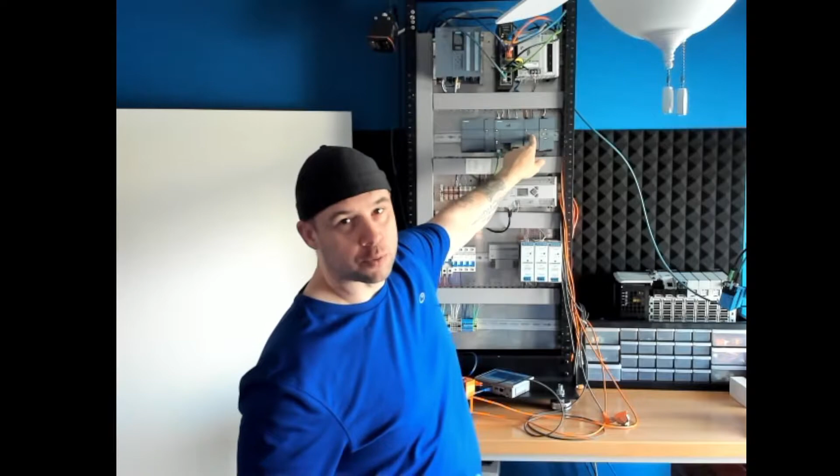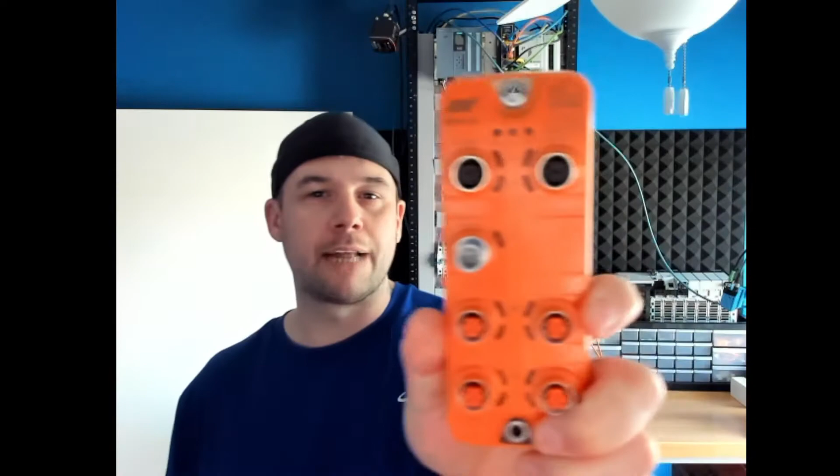So what we're going to be doing is connecting the SM1278 IO-Link module that's made by Siemens directly to their controller. So right here I have the 1200 controller, 1212C, and I have the SM1278 IO-Link module. Now, you notice that a lot of companies are actually producing these IO-Links. One good one is the IFM AL1100 IO-Link master. I'm actually going to be using IFM sensors connected to this module.

But what is the difference? I think the difference to me is in the application. If I've got something far away, beyond the reach of the cable, for these sensors I think 20 meters is the max, or maybe 10 meters. If I've got to go beyond that, I'm using the IFM. Because it powers up and it's got a network cable and M12 network connector. You could literally take it somewhere remote, hook it up to the network, make sure it's on the same network as your PLC, and you'll still be able to pull the data.

Now, with this route, this is whatever the length of the cable and below. So if this PLC is in the vicinity of where these sensors are going to be, that's when I want to use this. And another thing is, as long as you have the IODD file, which is a description file, we're going to go over this, you could actually put anything in here. So I can mix and match sensors. With IFM, I think they're only going within their family, but don't quote me on this. You guys can try it.

I'm gonna try it. If it works, I will post online how to actually mix and match these devices. So it's kind of nice to have one family in house, but we're also talking projects, money, and everything else. This would be the ideal option if you're working with this PLC. All right, let's get started.

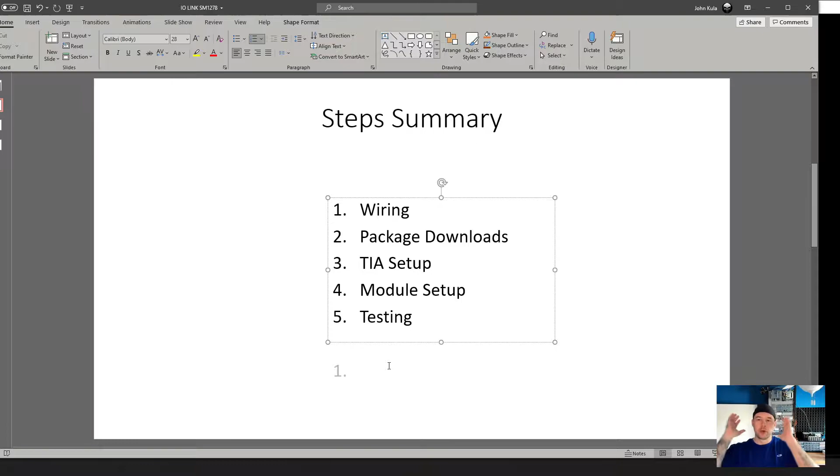Before we get started, let's go over a quick summary. We're gonna be talking about wiring, package downloads, TIA setup, module setup, and then finally testing. That is it. It's actually a quick setup for these modules. It's a little crazy, because you've got to do a couple things and you may be missing a couple things, but we're gonna go over this. I've got everything set up from scratch, like we just installed the whole entire module.

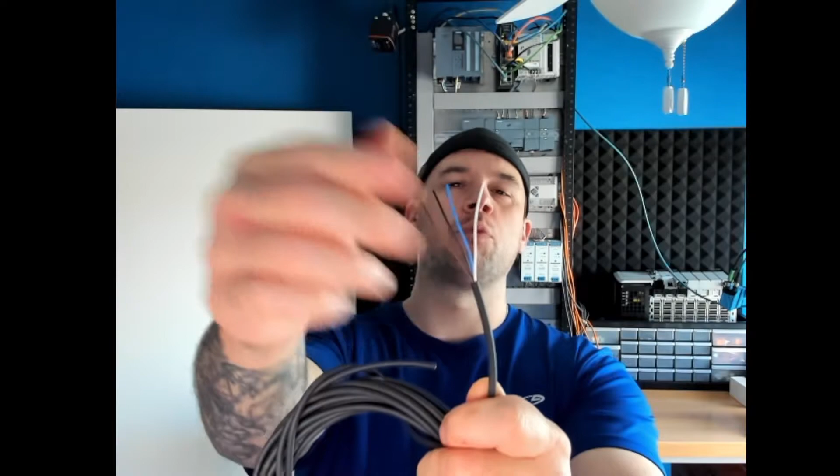All right, let's go over the wiring. The cable I'm using is the M12 cable, the 4-wire cable that goes from the sensor over to the IO-Link. You're gonna notice you have the white, blue, black, and brown. We're gonna eliminate white, so we've only got brown, black, and blue left over. These are the cables that are gonna be going directly to that module. Now, how did I get this information? Let me pull it up.

If you go into the IO-Link manual, you're gonna have the pin layout. They have the layout for 4-pin M12, and I think 5 and 6. So this one's for 4. Number 2 was the white, so we get rid of 2. That's why we've only got 3 cables left. And the rest are gonna connect to the 24 volts, the 0 volts, and then switching. That's all.

One more thing. You notice that you have SIO and IO-Link. When we go into the software, we're gonna see these options. You want to be on IO-Link for this. IO-Link on a distance sensor is gonna give you the values. The DI/DQ is just gonna be on/off like a regular sensor. But the software is actually gonna determine that.

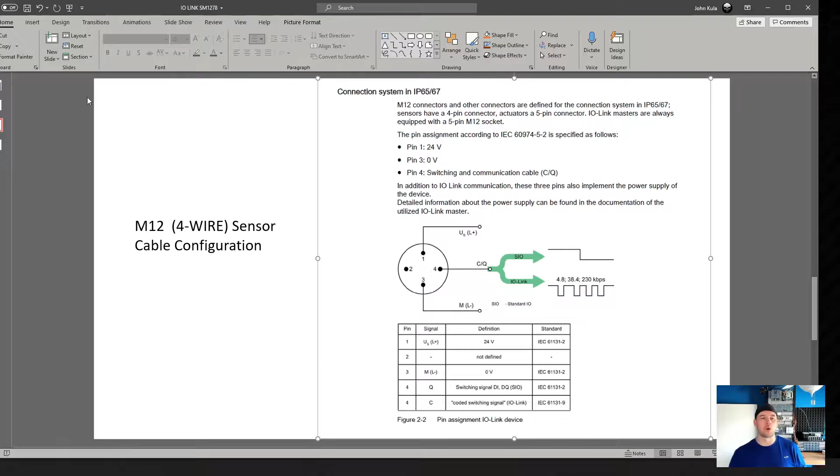All right, so from the plug going over to the actual module. On the module you're gonna have the 24 volts going to the card. Then you're gonna have your layout. So here's how this is laid out. This is sensor 1, so the top back is actually 1. Top front is 2, bottom front is 3, and then bottom back is 4.

The way I have mine set up is I have sensor 1 and sensor 2, so I got the top filled up, and I got sensor 4 wired in. So I have no sensor 3. And the reason I went with this option is because if I need to wire in another sensor, it is actually in front. So the bottom portion right here is actually top. This is the back side of the controller. So it's going to be a lot easier to wire it into the front than the back. So that's why I'm using 1, 2, and 4 versus 1, 2, and 3.

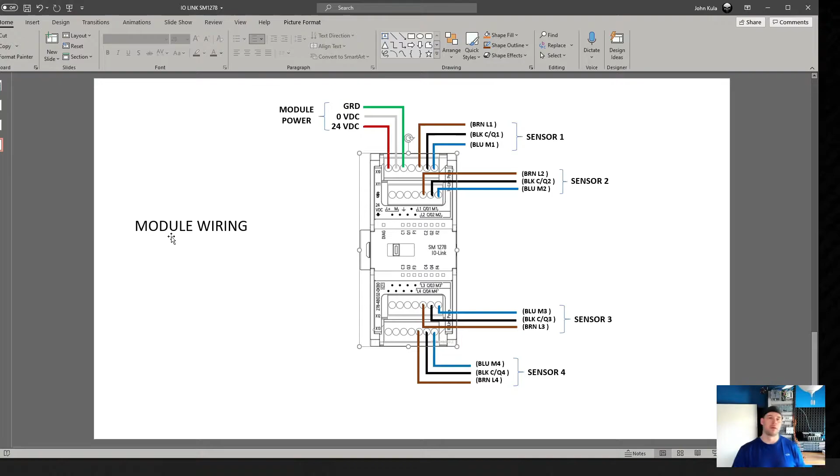All right, let's go ahead and move on to software. If this is your first time actually working with this module, you want to get a couple packages. The first package you want to get is an IODD file for your sensor, so IO device description file. Mine is IFM. The sensor I'm working with is O1D102 and O1D120. If I scroll down, I'm looking for this IODD. This is actually going to go into the catalog of the next piece of software that you're going to need to configure this module.

The next piece of software is going to be right here. This one is a port configuration tool. You could download this directly from Siemens, but when you install it, it's going to ask you to restart a couple times, so make sure you save everything before you run this. This is what you're going to need to go into that module, and I'm going to show you how you know whether you need it or not. And of course your update files. If you haven't updated TIA Portal, this is also a good option. Update all your files, so that way you're not trying to wrestle 10,000 problems with having a wrong file.

All right, so now that we have our devices wired up and our packages in place, it's time to actually start configuring the device. I already have the PLC configured, but I'm going to configure the IO link. The first thing I'm going to do is determine what I want to do with my application. If I click, it's going to give me input, output, or input/output. In my case, it's just the input, so I'm putting data into the IO link module from the sensor. That's it.

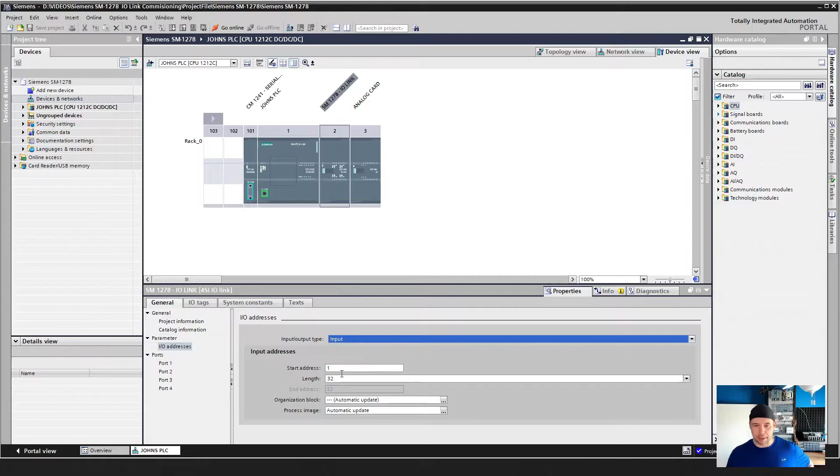The next thing I'm going to determine is the starting address. They're telling me it's 1 to 32. If I open up my ports, my next available is actually 1, so 1 to 32 is perfect. I'm not wasting any space, because I have the PLC input address 0, and this one is 1 to 32.

And what's the length? Mine is to 32, but it depends on how many sensors you got in there. If you want to save some space, you could leave it to whatever amount of space your sensor requires. In my case, those are 8 bytes a pop. So I just opened it up all the way to 32, and later on if I need to add a sensor, I don't have to mess with this anymore. I'm gonna leave organizational block and process image alone, and I'm done for this portion. The next important portion is going to be going to the sensor.

So if you click on the sensor and you right click it, you're going to have a change device and start device tool. So this is the port configuration tool that I was talking about downloading. If this is grayed out, that means you need that tool. Just stop, pause the video, go to Siemens, download the tool, install it, restart your stuff, and you should be able to access it. If you already have it, let's go ahead and start working with it.

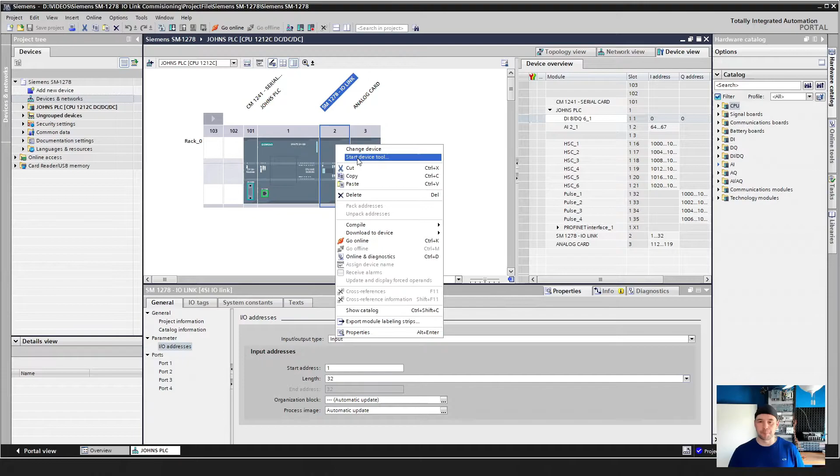So I'm going to go ahead and click start this, and then click start. All right, so when you open this port configuration tool, it's going to give you everything about this IO-Link master. So it's going to give you the product name, article number. Now, the important thing right here is the ports. So you have all 4 ports here. In my case, we're going to occupy 1, 2, and 4. 3 is a blank, so it's going to stay deactivated.

Now, if you look on the right-hand side, you have the IO-Link version 1.0 and then IO-Link version 1.1. If you open this up, if this is your first time using this and you actually start commissioning this, you may not have this folder. I'm going to show you how to actually get these files. But you may have only Siemens and then standard. And if you go to standards, you have generic device. If you go to Siemens, you have all this other stuff.

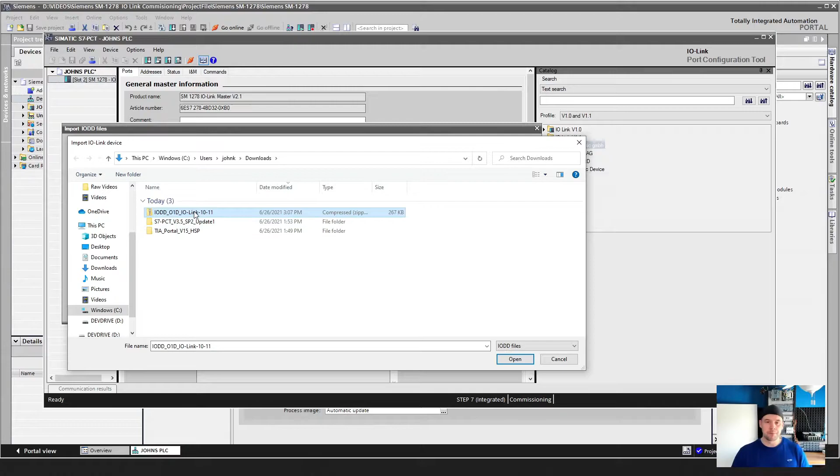But let's say your device is like mine, which is a whole different brand from Siemens. So I need to go ahead and install these files. So these are the IODD files that I was talking about. Well, here's how you do it. If you go into options and you go into import IODD files, and browse to where you have them, mine are going to be right here in my downloads. You notice that I haven't unzipped this. So this is actually asking for a zip file. So you don't want to unzip it. You want to give them the zip file, and you click open.

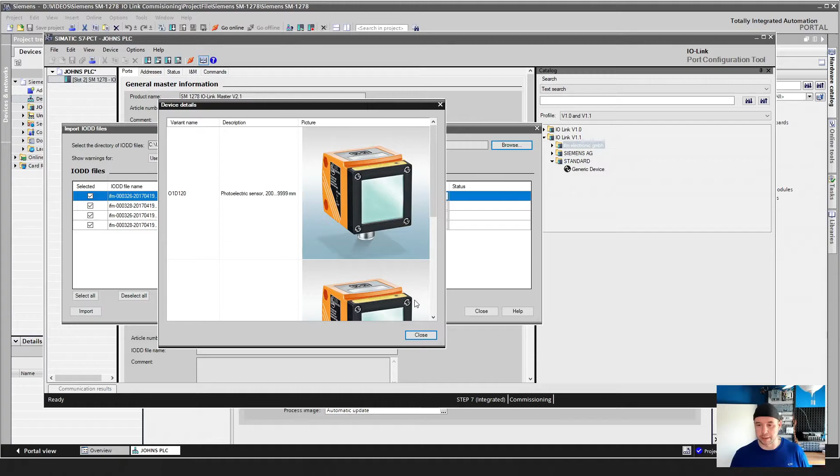When you click open, it's going to give you all the devices. So once you have the devices, you can actually go into show. Go to show. There we go. And it's going to give you the information about it, the picture, so on and so forth. I think they use the same picture for the same sensors. They are pretty much the same looking sensors. The only difference is the model number. Okay, let's go ahead and close this.

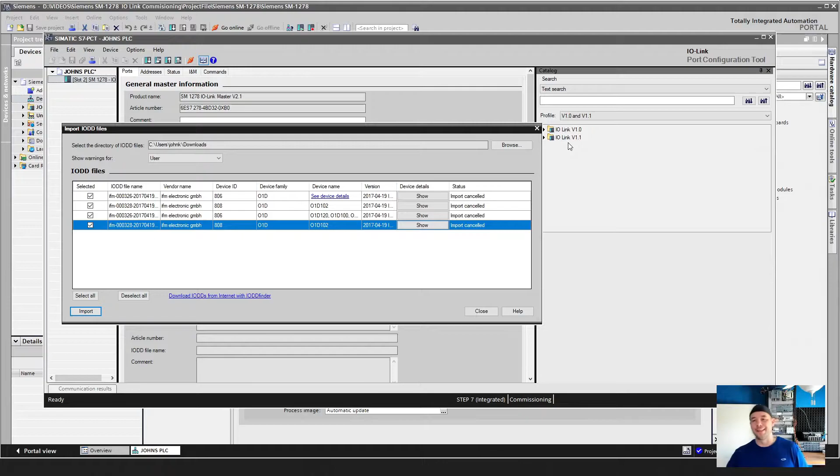So we have these devices. Now you're going to go in, select all, whatever you got to do, and then click import. I don't have to import it. If I click import, I can re-import it, but it's going to tell me replace all or skip all. I'm just going to skip all. In your case, if you don't have it, it's going to download to this portion here. And then you're going to have these files. So I'm going to close this up. And this is how I got this IFM electronic folder.

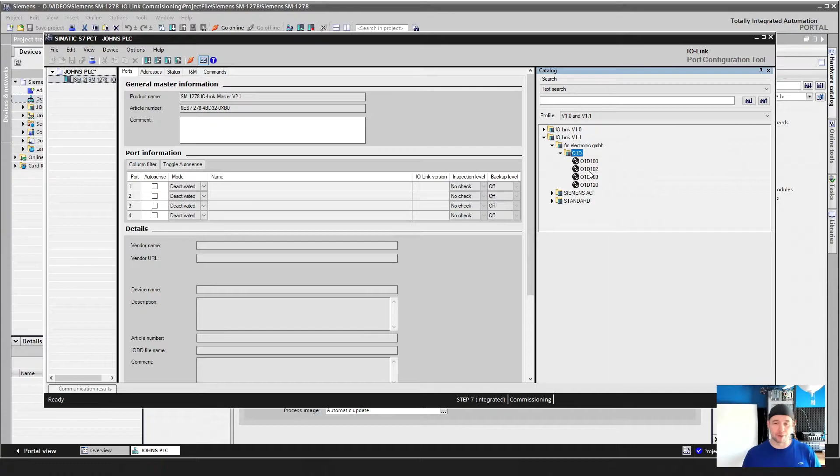If I click on this, I guess that's the folder that they named. If I open this up, here's my sensors. So I'm only working with 102 and 120. The rest of them, I've never worked with. So now, if you got different sensors, make sure you write down which port has what. I was wrestling with this thing for a while when I set up for the first time. So make sure you have the right sensor in the right port. So in my case, I got the 102 in port number 1. Then I got the 120 in 2, and I got another 120 in port number 4.

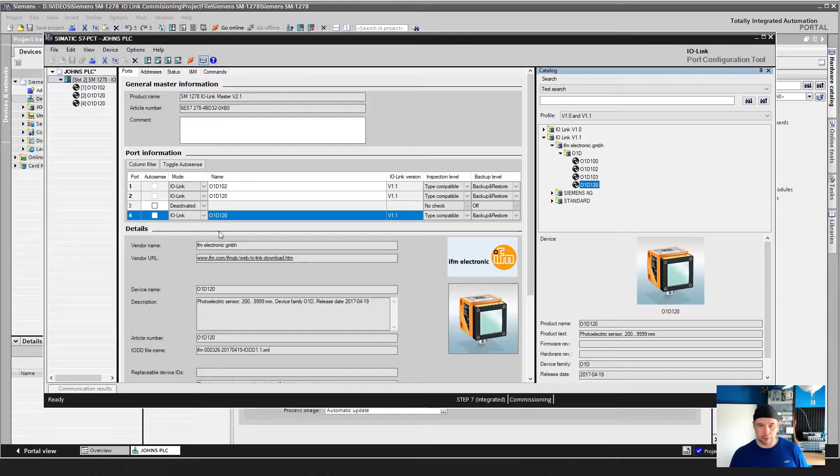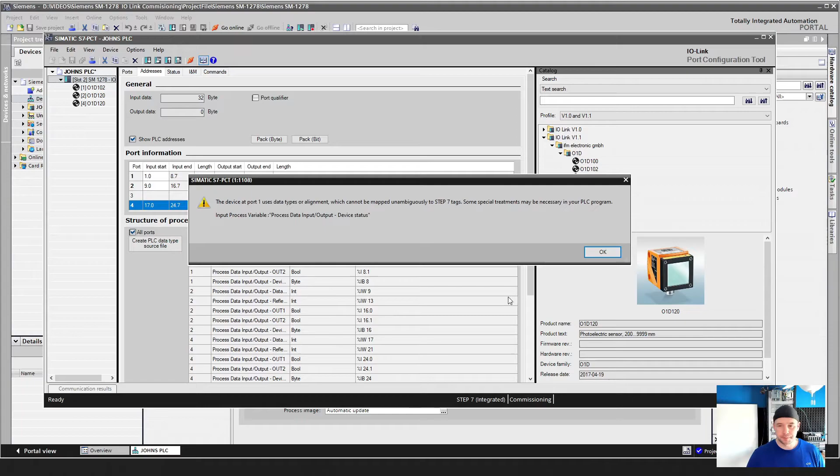Okay. Now, when you set this up, if you go to addresses, show PLC addresses, click OK. It's going to give you the PLC addresses for these sensors and where they start and finish. So mine are only inputs. So they start at 1.0 and end at 8.7, and then 9.0, 16.7, and 17 and 24. And I got the 3 as a gap. If I go to all ports, click OK, click OK.

It will give me all the actual tags that I need for those sensors, right? So if I open this up, we have it for each sensor. So port 1, it's got all this data. Port 2, it's got all this data. Port 4, it's got all this data. In my case, I care about the distance, and I'm looking at device status. So this is what I care for, but the rest of it is already there.

Now, you could actually create a PLC data type source file. So if you want to take this, you could actually export this and have it. But what I do is I'll take all of this, I copy it, I will open my super duper handy Excel document. Whoops. All right, and I will drop this in there. Let's drop it this way.

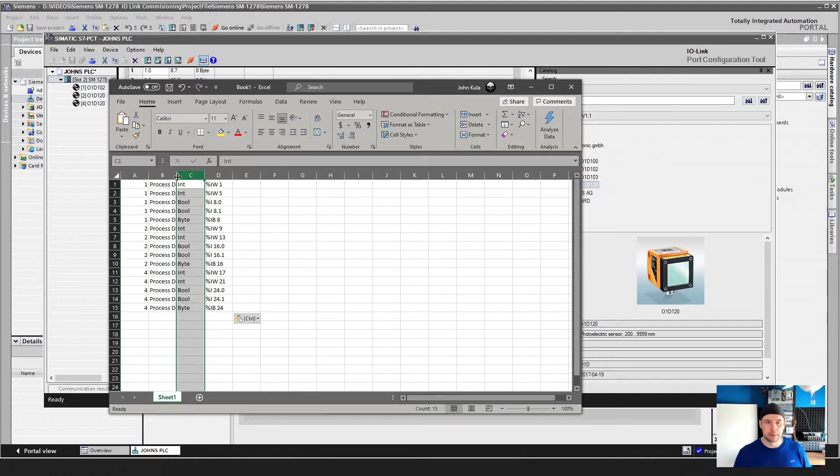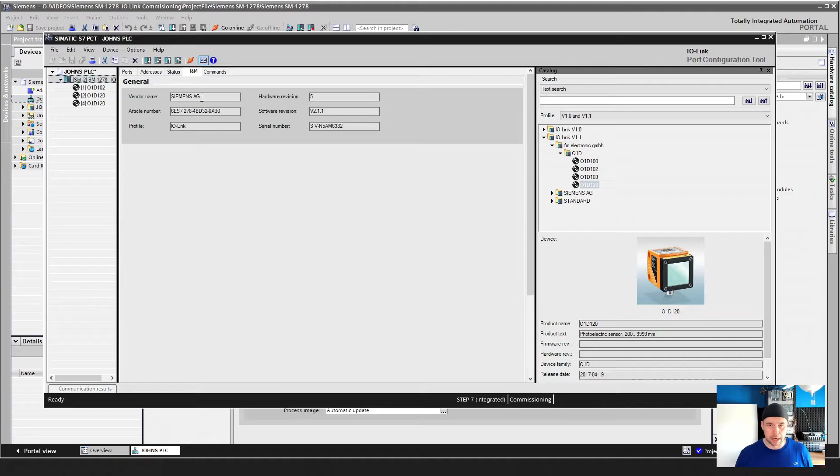All right, so I have this pretty much in my file for reference, but there's a method to my madness, right? So this is one reason: I won't forget it if I download it or get out of this tool. So I'll put this off to the side. We don't need it right now. All right, so we have this set up. If we go to status, it's not going to give us status yet. Nothing yet here. We're going to have to download it.

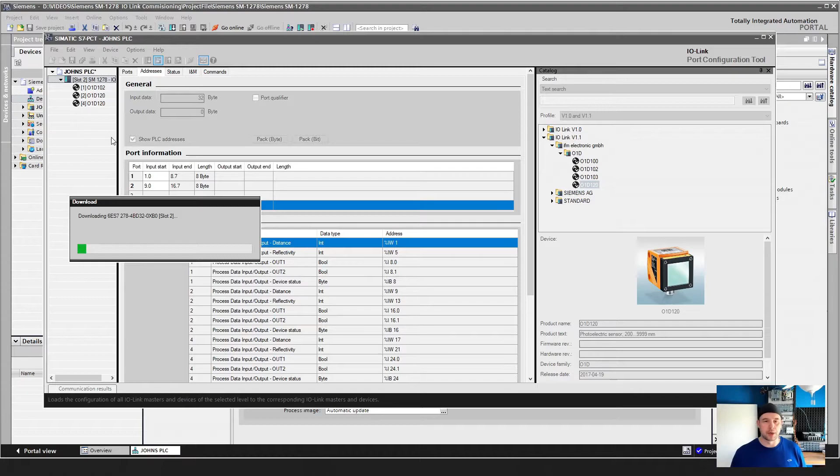So right here you have load with devices, load to PG with devices. Since I have devices already, I'm just going to click load to the controller with devices. Now this thing's going to go ahead and start loading to that IO link. All right, everything downloaded, took a little bit of time. But if everything downloaded correctly, you should see all green boxes here, and you should see all green ports on your IO link.

Now, if you have red boxes here, chances are either you got the wrong device, the wrong wiring, or the wrong port. So you want to double check that. If you look at your IO link and you got blinking lights, this is where the problem actually is, which port it is, so you know exactly where it is. Now, if you look at your IO link and you got smoke coming out, something's wrong. So you need to shut it down.

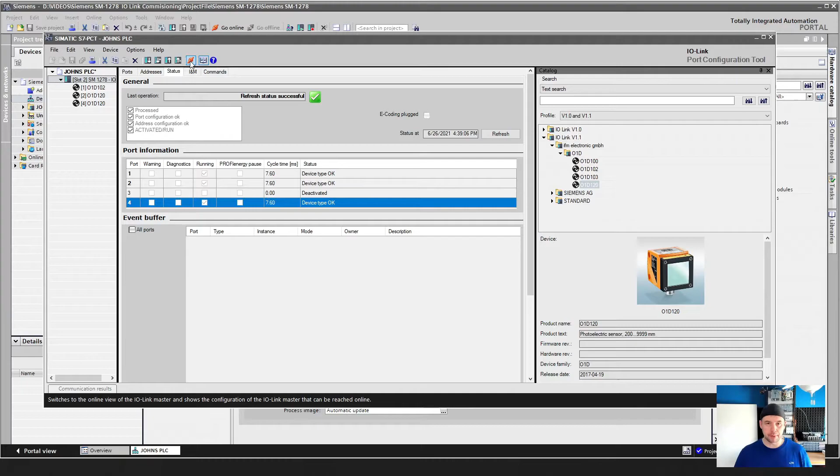All right, let's go ahead and move on to the next thing. So we did the download. Everything is good. You have that green check mark right here. Let's go ahead and go online with this device. So if you go up top right here, you have that little plug thing. Click on it, and it should start taking you online with the devices. So the cool thing about this, you can actually preview the sensors in this configuration tool. You'll be able to see all the data coming in, so you'll be able to adjust it.

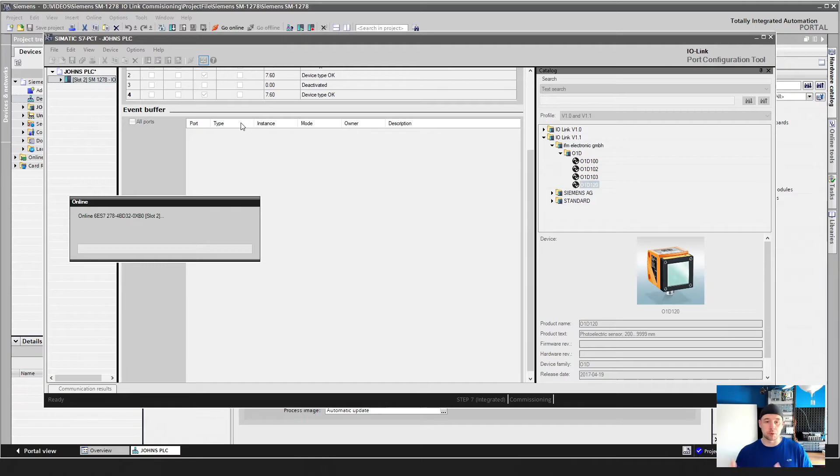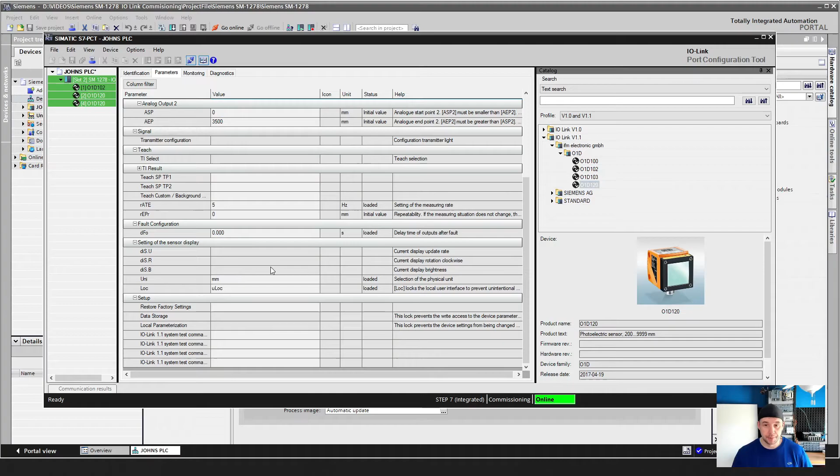All right, so I paused it, because it took a little bit to get online. But we are online right now. You're obviously going to see the big green online indicator up here. But if you go to the left and you open this up, you can actually go into the sensor. So each sensor is going to give you a little bit of data: the identification, parameters. All the parameters for that sensor are actually here, which is cool because you could get some cool stuff out of this too. Monitoring. So this is what I was talking about.

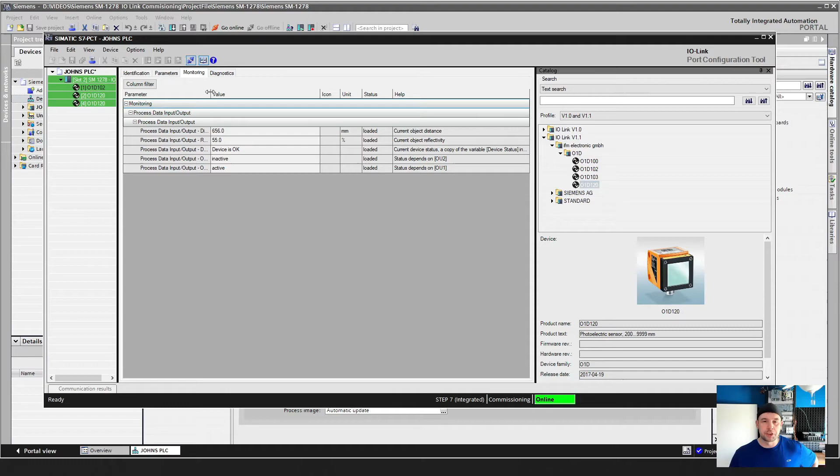Right now, my 102, the shorter sensor, is reading 656 millimeters. Let's test it. All right, it's actually live data, beautiful. So I'm flagging that sensor and it's actually changing the data. So I have a lot of cool information that will help me troubleshoot later on. Open this, there we go. Like the reflectivity for the sensor. So the less reflectivity you have, the worse of a signal or a lot of jumps you're gonna have. But there's a lot of cool setup features in these sensors.

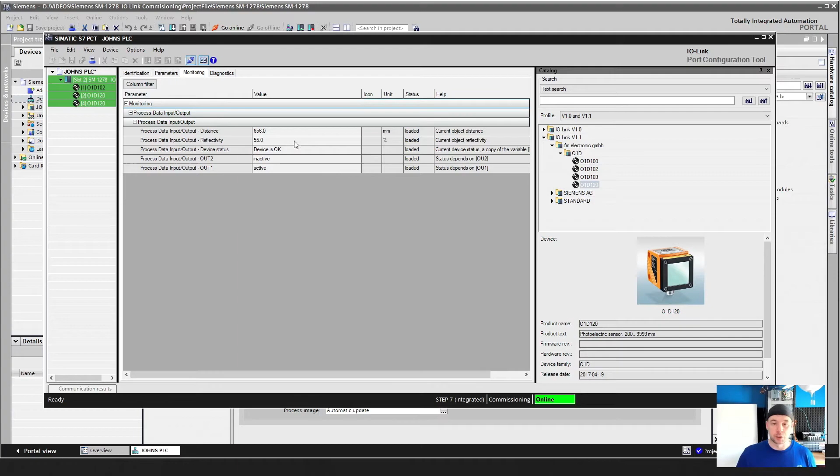So you can actually stabilize it. So you see all this data right here. Now earlier, well, let me go offline with this. So I'm done here, right? This is set up. I'm seeing the sensors. I don't have any problems. Now it's time for me to actually go into the program and test to make sure everything is good.

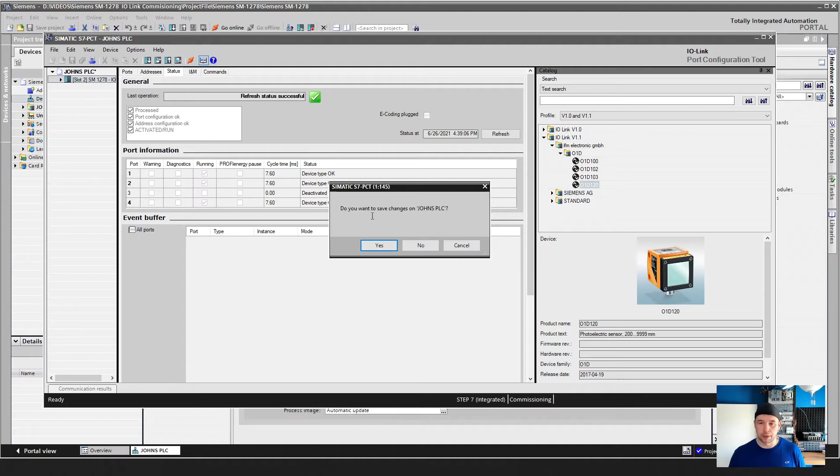So I'm going to go offline right here. And I'm going to close this. When I close this, do you want to save changes? Yes, I do. So now it's saving changes and it's going to take the whole thing offline. Now, why did I save all these tags? So I told you earlier, it's reference. I got a little trick. Sometimes I lose things and it's easier for me to just put it on something and remember it.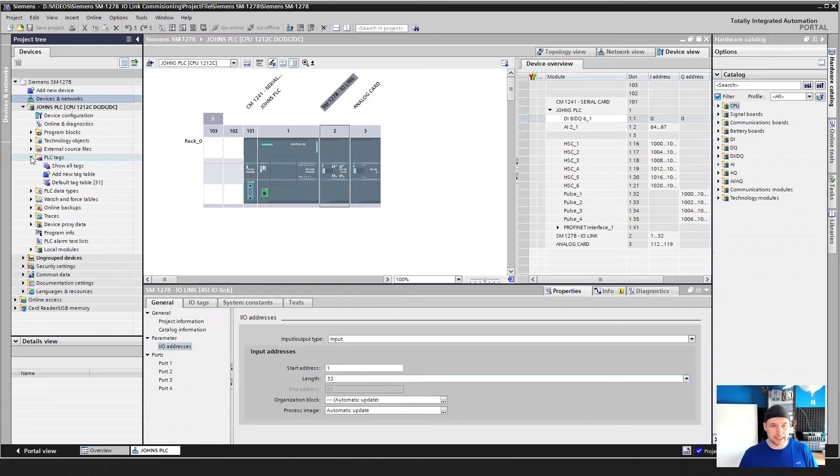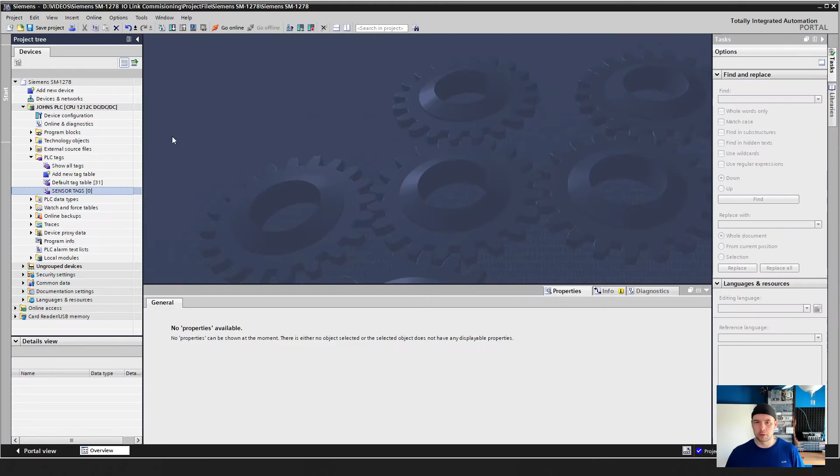Now, if I go to my sheet, I can rename this how I want to. So I could put sensor one distance, sensor one reflectivity. But for now, let's go ahead and take a couple things. First thing I'm going to do is match the data type and address. So I have the data type and address. I'm going to take all of this, copy it, go into my PLC, and paste it. Boom. Well, looks like it took one.

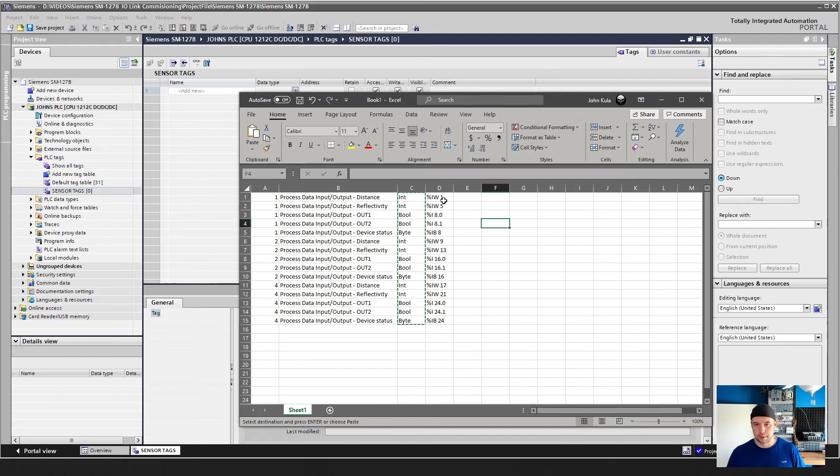Okay, hold on 1 second. Let's go back to our thing. We are missing our thing right here. Copy that. Paste that. Yes, we want to override. All right. Oh, that's where we screwed up. All right, let's erase this. Let's delete this. Let's start again. Do it right. I'm going to take these. Copy. Put them under address, the right freaking thing.

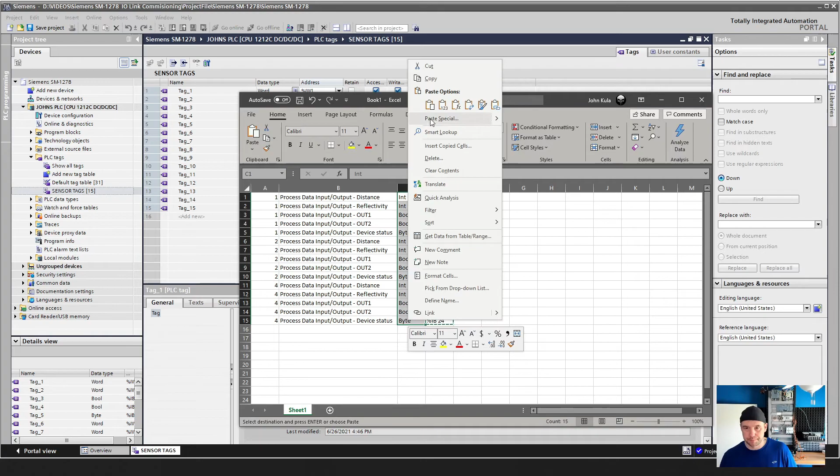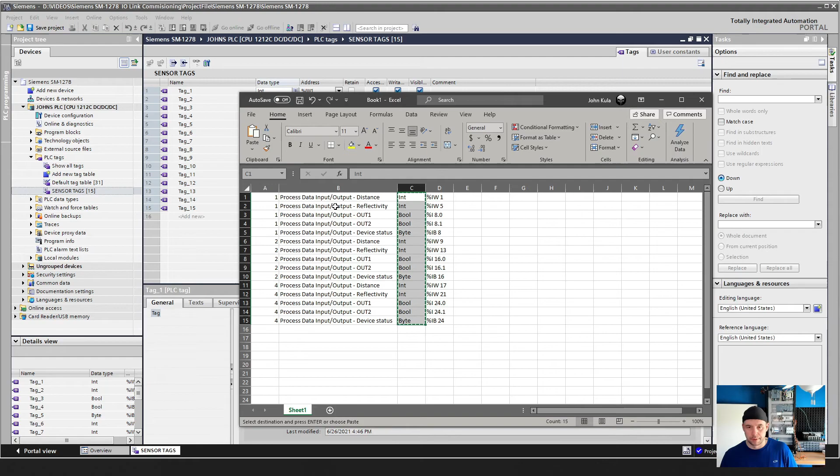All right, beautiful. Now, you notice this already populates all this stuff. I'm just going to go back and make sure that my data types are correct. So I'm going to highlight my data types, copy those, put it right here. Paste them. Now we have correct data types. And then the final setup is our stuff right here. Paste. Yes, all right. Boom, done. So now we have our tags set up.

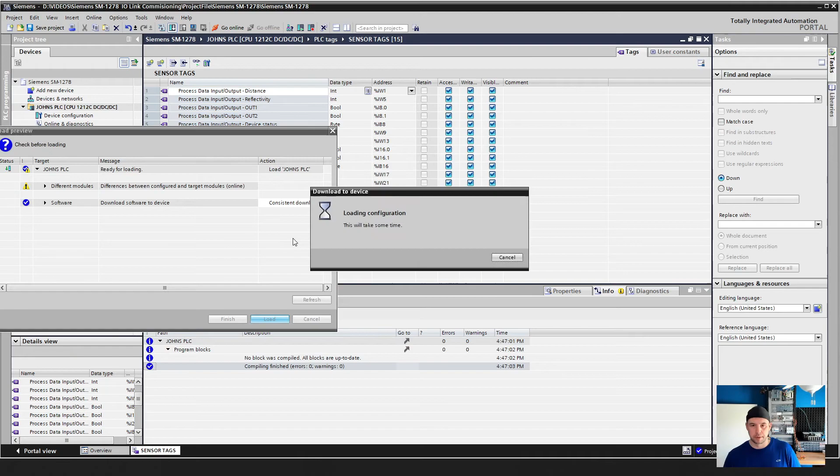Now we go ahead and download this whole thing to the PLC. So we're doing the same old, same old. Load it. Beautiful. We are done. Let's go ahead and go online, and we're gonna go ahead and fire this off. So as you can see, I have the sensors. I have the first sensor here, second sensor, and third sensor right here. Let's go ahead and flag them. As I flag them, all these change. So it's nice, quick, easy. Transfer, and we're done. Now I can start using these tags in my project and start developing whatever I gotta do for the application.

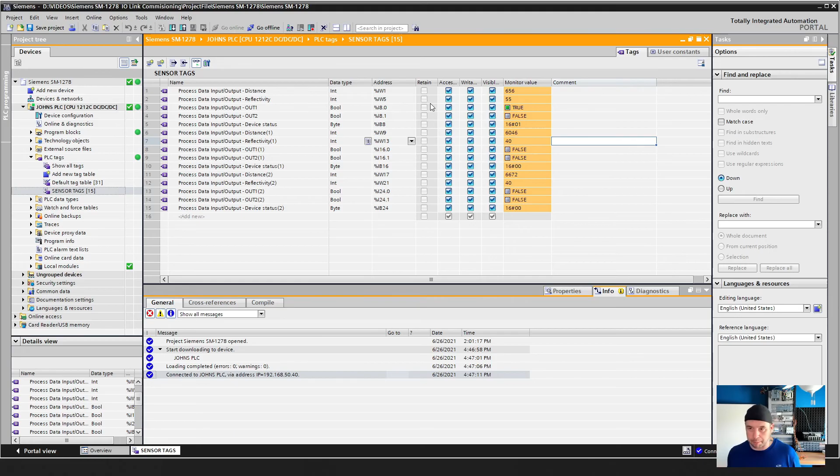All right, so this is how you set up that whole entire module. It's not really hard. There's a lot of small little steps when you start off, but it's not a lot. And the cool thing about it is, like I said, you could change out the sensors. You could test with different sensors in your applications and pull that directly in there. As long as you have the catalog files, you drop them in, you're done. You download it to the PLC, you run it, you could actually do the checks. If you set up an external block for your sensors, and then use the temps inside of function blocks or whatever, then all you got to do is change that block and everything else will follow. So it makes it really nice and really simple.